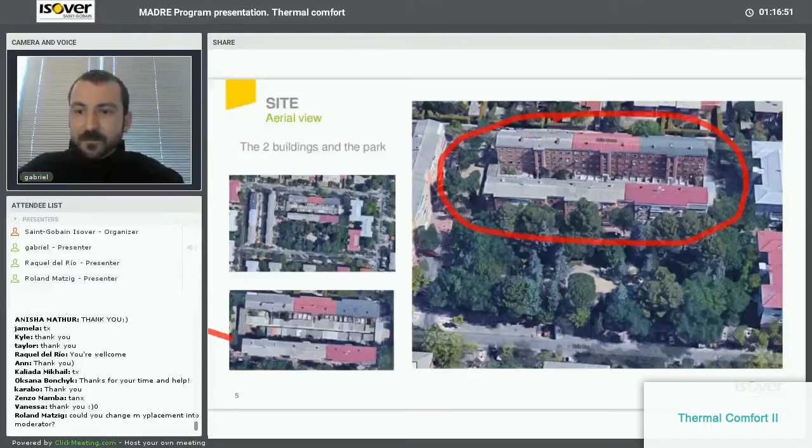We were speaking about the multi-comfort. Well, if we are speaking about the multi-comfort program, and Roland now is the presenter, I'm just going to focus very briefly on a few slides before welcoming Roland to tell you a little more. So, when we are speaking about the multi-comfort program, we are speaking about these dimensions of comfort: thermal, acoustic, visual, and indoor air quality.

Now, in the coming hour, maybe a little bit more, we'll have with us Roland Matzig. He has been a good friend of the contest for many years now. He is also an architect specialized in energy efficient houses. He is one of those few that not only preaches but also walks the talk, and I'm going to show it to you. And perhaps the most important point is that he is part of the international jury.

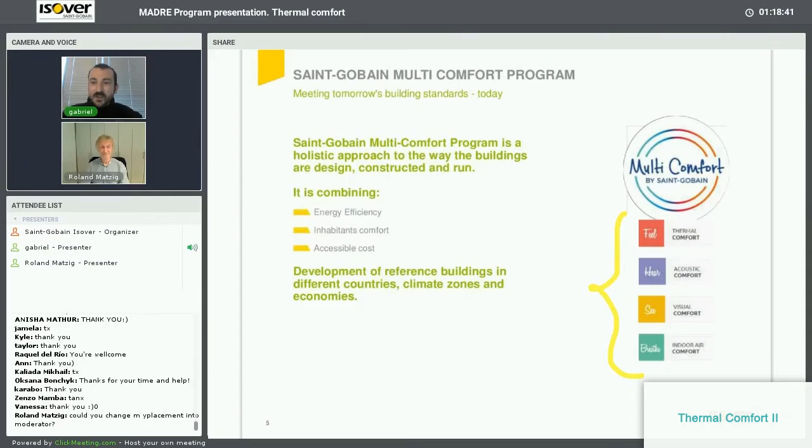So you already had the chance to ask a member of the international jury some questions. Here I give you the chance to ask a second one some questions. Of course, I'm not going to allow him to answer about the criteria, although these criteria are public, you have seen them. But I would like to pinpoint a few things before going to his presentation. Yeah, you have all seen this.

Energy efficiency and thermal comfort have a direct influence on the performance of the human being. And this is extremely important. This is why we are taking it into account, not only because of the CO2 emissions or the greenhouse gas emissions. It is also linked with the people. You will feel better, you will work more efficiently.

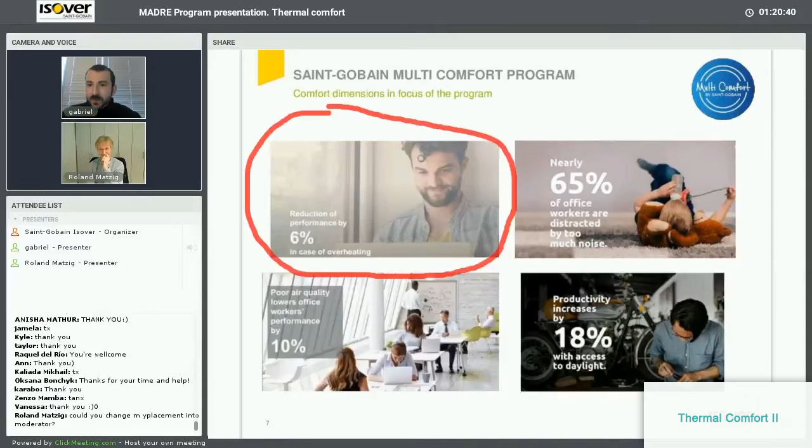Now, before going to the presentation, what I would also like to show you again, just allow me to find it. You will see, for example, a renovation work, this being the office and the house of Roland, as he is living here and working here. So it's quite comfortable to go down in slippers in the morning to take your coffee in the office. This is a multi-comfort house according to all the criteria.

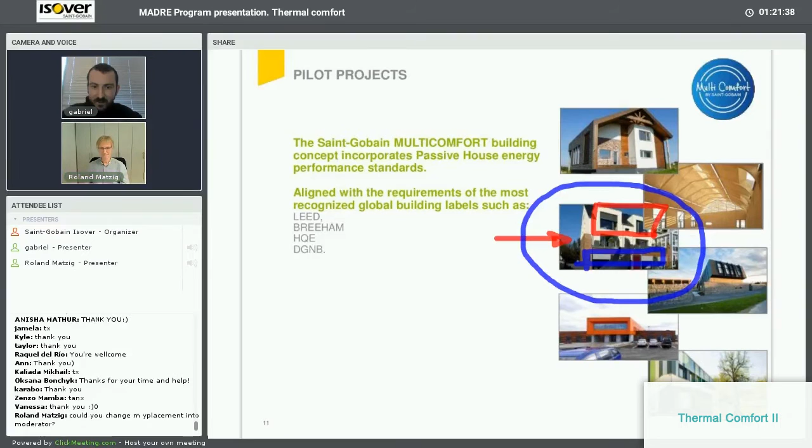And hopefully I will find the presentation. Just one second. I believe it is this one, Roland. Yes, this is the one. Great. Now, can you switch on your mic so that everybody can hear you? No, we cannot hear you, Roland. You don't have the mic switched on. Is that the one? Yes. Okay, great. So hello everybody. Something is on my screen here, but I think only I can see it. There's a question and answer display. I just got it away. Anyways,

What we are talking about is reduction of CO2 emission. That's the basic driver of our thinking, and also the ground you're building your visions on for this student contest. Because the consequences of increasing CO2 emission, we all know that already, are global warming, the greenhouse effect, and all the following problems like climate change, rising sea levels, and all of this. I'm not talking about climate change now, but I just want you to get back to the roots, so you are able to find the answers by yourself by grounding your vision.

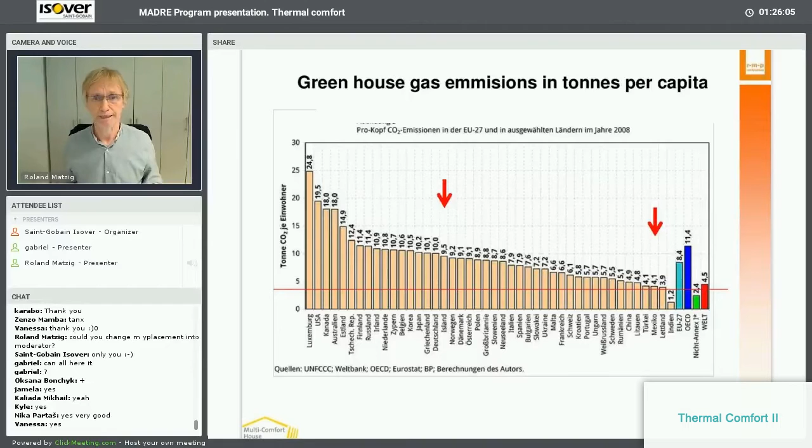So the EU might be a bit lowering down, but we have to go a long, long way. Because, take Spain again, from 8 tons coming down to 3 tons doesn't mean that you have to change a little bit of your lifestyle, a little bit of your behaviors on the dwellings, of the size, of the energy efficiency of the houses. It is a big step. It's almost a third of what Spain is polluting right now.

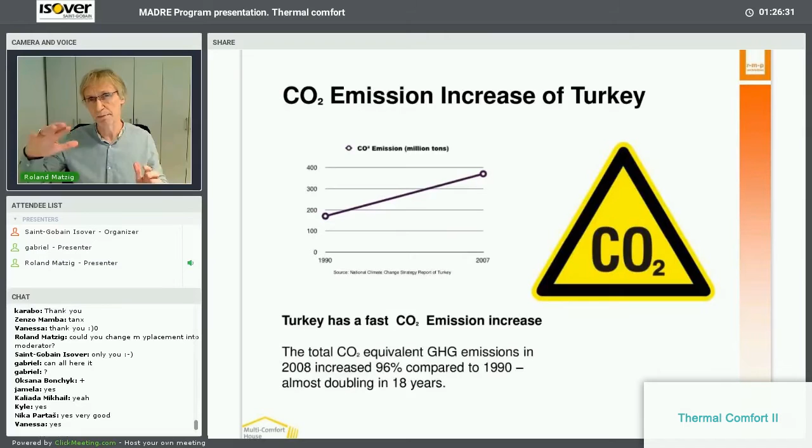So what we have is an emission increase, which is dramatic. And to be honest, all the EU members are rising. Even though they promised themselves to cut down their CO2 emissions, they are rising every year, step by step, and so is the world. So we have a big thing to do.

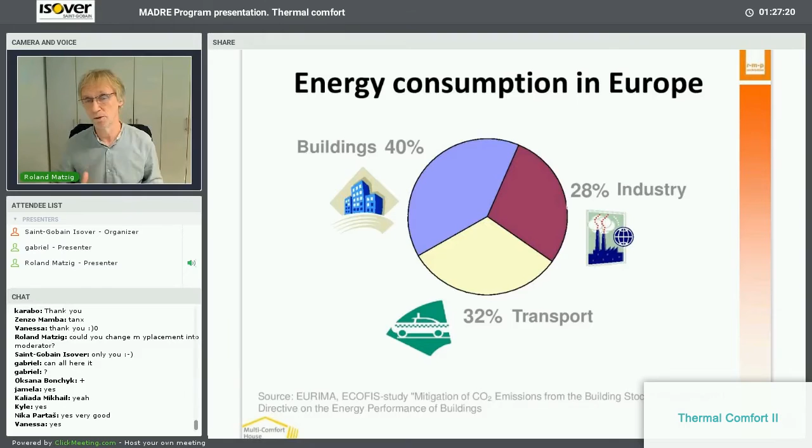And to make it kind of easy, you look at this scale, and you find out buildings are 40% of all the pollution. That's almost the same in all the EU countries. It's a third the transport. It's almost a third the industrial needs like electricity and so. But the buildings, the heating and the warm water is 40%, and this is a huge thing. And this is a huge chance as well, because if we have the buildings cut down by half or even more, we have the whole picture showing a totally different face.

And what we want to do is we want to have the limit of the energy demand as the basis. We are not talking about how to produce it. First, we are talking about how can we realize the savings. The limiting of the energy demand is the major question, and that's why I especially like this year's contest, because we are talking about existing buildings.

If we are going to have a look at the new build, it's easy to say, okay, let's make a passive house and then it's going to be easy because a passive house has low needs. No, the big challenge is the existing buildings. And this year's contest is about existing buildings. You might have the idea of adding some levels or anything to the buildings, one way to think about it.

But the interesting part is how can I cut down the demand? How can I limit the demand of the existing volume of the building I'm designing or talking about? And then, when this first step is done, we are thinking about how do we get the demand produced. Of course, we want to have it on a renewable basis.

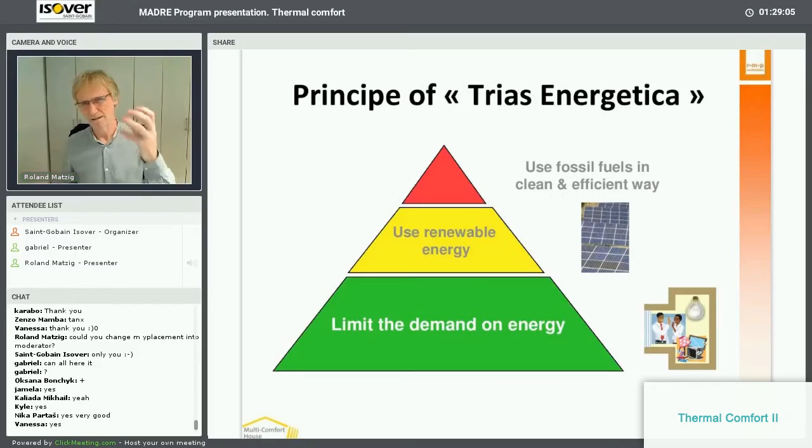And if you've got this red tip, you have a little bit left on fossil fuels, no problem about that. But the green one is the very important step, and the yellow one is the second step on top, and then the rest, you're not talking about the rest. And of course, cutting down the needs. We might have these existing buildings.

I've not seen any actual figures so far, but I guess that these buildings have a need of above 200 kilowatt hours per square meter. I assume so. I'm not sure about that. But you definitely want to have them down in the direction of passive house quality, it's better if you reach it, which means in the existing 25 kilowatt hours per square meter a year at the maximum, and in new build it's 15 per square meter a year. You might know these numbers.

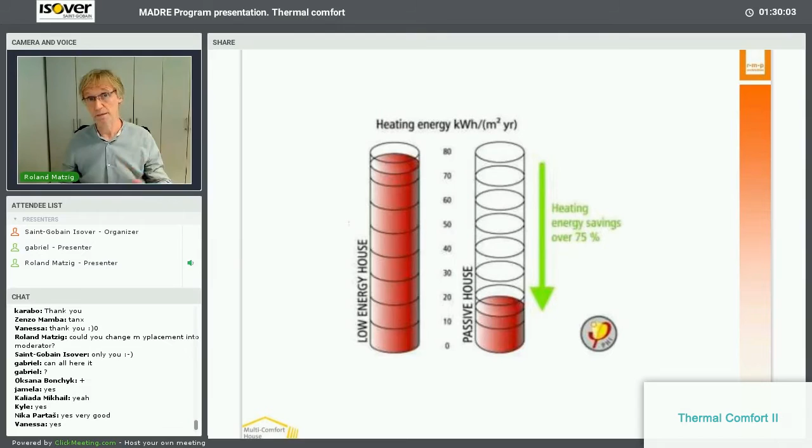Let me give you a goal. If you end up with 20 or 25, be happy with it. But if you can reach the 15, super, absolutely super. But not thinking about just cutting it in half and ending up at 100 or 80. That's not the goal we're heading for.

So this passive house, or these energy efficient buildings, is eco design in buildings. So carbon reduction comes first by insulation. That's the one and only thing. Insulate this bloody shell of the building to a maximum because it's cheap, it's sustainable, it's good for everything. The second thing is you want it to get airtight, because if you have the insulation, the airtightness gets more and more interesting. So the second step is airtightness.

And in this shell, in this envelope, you find all the openings, the windows and doors. Of course, you want to have super glazing and you want to have super doors. And once you have the shell, the envelope optimized, looking at the energy losses, then you want the MVHR system, the mechanical ventilation heat recovery system, which brings you also a step higher on efficiency and gives you super air conditioning in the building constantly.

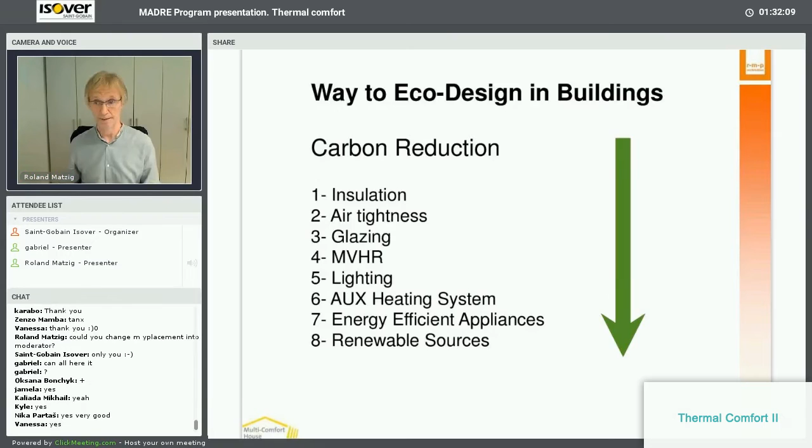Fifth point, you want to look at the light. You don't want to have dark rooms just to have a super insulated wall. You want to have very good lighting, which means look at the windows, where they are placed, in which direction they face, in which size they come along. So bring them in place so that all the rooms have optimized natural lighting. And the rest, like heating system, energy efficient appliances, renewable sources, comes naturally once you have the first five steps done.

So number six here, the secret of certified passive houses. You know that passive house is the only house or the only building system you can certify. This might be a long discussion, if certifying passive houses makes sense or not. But at least we have a certifying system, and this system really works, which has been proven for 20 and more years now. So passive house is the only construction concept you can certify.

And once you're an architect, you might have to answer this question for yourself. Does it make sense? Does it make no sense? For example, we have been building passive houses for more than 15 years now. All the projects are in passive house standard. A few hundred are built. And of course, we have not certified all of them. The first ones, the first 10, the first 20, we went for certification. And then we learned how to do it properly and how to really get the house done so exactly that it's going to be certifiable.

And then we learned to save this money, but we had to do this first step to come to the second step where we can say to our client, are we going to go for certification or not? But if you are thinking about passive house, which has nothing to do in particular with the student contest, I'm telling you out of practice, go for certification, go for this quality improvement, and then you'll find out passive house is energy efficient. Absolutely, it's the best standard you can find.

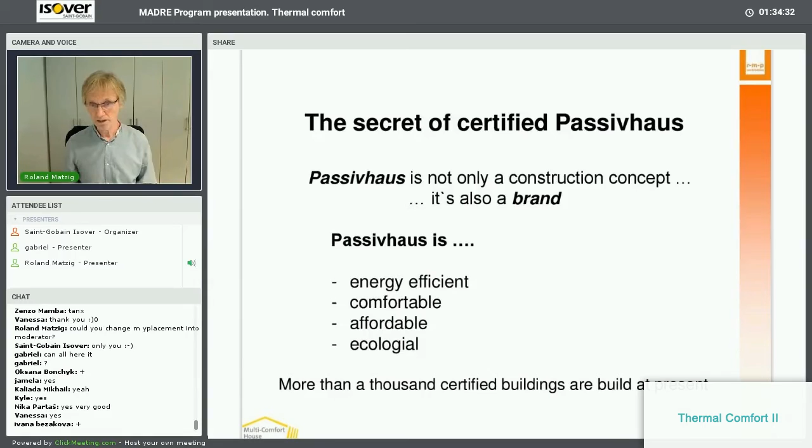It is comfortable. It gives comfortable living to its inhabitants. It's affordable after a few years. All this extra investment for the top level of energy efficiency is going to be paid back by the bills for running the house, and it's ecological. So more than 1,000 houses, a few thousand houses, have proven these facts.

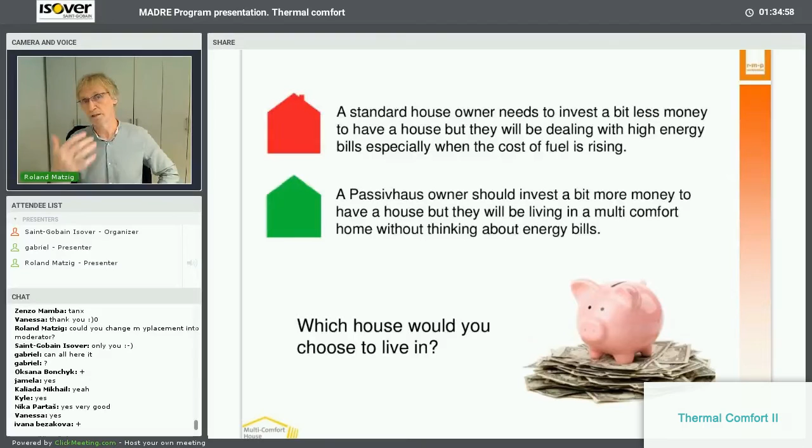So when you have made the decision to go for a passive house and you ask, for example, the owners, by now they will all tell you, our owners do tell us, we would never want to have anything else than a passive house. And even if it was a bit more of an investment, maybe 3%, 4%, 5%, we would do it again. I expect you're familiar with all this information.

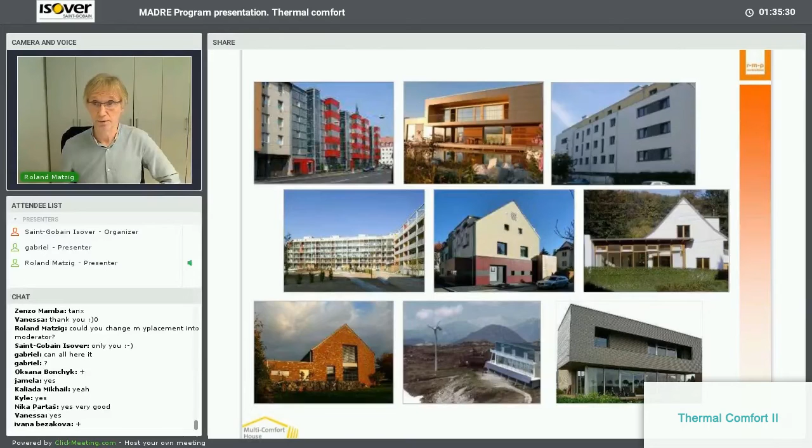You find these houses in all kinds of styles: single family houses, multi-family houses, commercial, schools, kindergartens, big houses, small houses, renovations, even on top of the mountains, in the desert, everywhere. By now, you find the passive house concept running and working everywhere. And it's always following the same principles. These principles are displayed on this sheet here.

First of all, the envelope, which is in your student contest quite a challenge, because maybe you can't run the insulation around the house just like that here, but that's what you want it to be. Around the house, you want to run an insulation layer and also an airtight layer. The blue and red line here means the airtight layer, and by working on your details, you should think about all these little details. How do I run my airtightness layer all along the envelope?

And then the second thing, the MVHR system. You want to have an MVHR system, which means fresh air in, exchange, fresh air in the house, but warm extraction of the air, exchange of the heat, and exhaust air out. So most of the heat stays in the house. Ventilation minimum 75% recuperation is the threshold, but you will find units that recover up to 90, 92, 93%. You should go for these even in your renovation, because it makes it much easier for the whole system to be on passive house level, because you might have some trouble running the insulation.

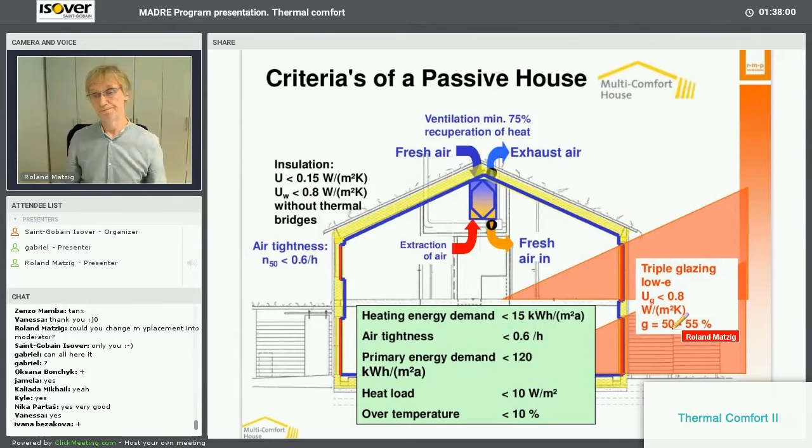Thermal bridge free. So you can, for example, have a higher recuperation percentage, and then it levels a little bit. The second very important fact is, where do I have my windows? Which quality of windows do I have? And how much of the solar array do I gain for the internal heat or cooling of the house? You should have at least triple glazing with a U value of 0.8. If you have 0.7, 0.6, 0.65, even better. And your G value, which means how much of the warmth...

I'm still here, don't worry. Well, Roland has joined us from Mannheim in Germany. I know, I see it. So as you can see, it's quite challenging. We'll wait for him to get back on track.

He was mentioning the triple glazing. Now, I'm sure all of you have been going a little bit through the documentation. If you have not done that, I strongly suggest you go through the documentation available on the website, the website of the students. Within this website, you will find quite complete documentation. One of it is a multi-comfort house in hot climate, and this is an analysis of multi-comfort house in several climates, one of it being Madrid. You will be able to see the recommendations in terms of glazing. As Roland was mentioning, he was speaking about triple glazing. In some cases, you can reach the same levels with double glazing.

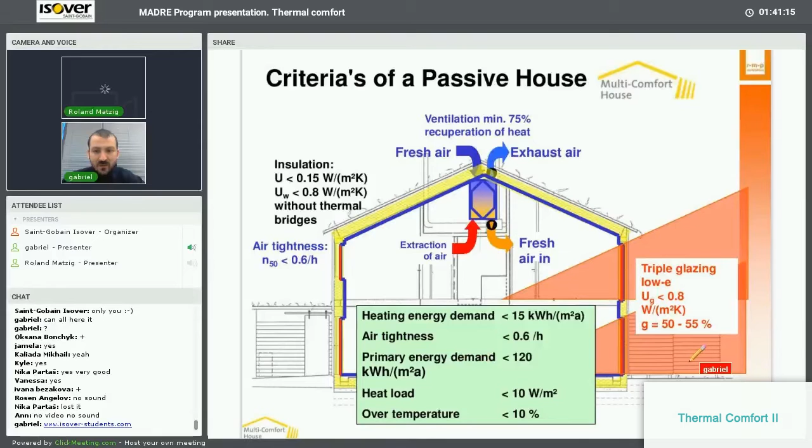Furthermore to this, what I would add is that it is not that complicated as a principle, or not at all complicated as a principle. The question is to treat correctly all the points. Once you have done that, you are within the right philosophy. If you are with the right philosophy and doing it step by step, then everything will fall in hand one after another.

Now, the main 10 points that Roland will also talk about once he joins us back: thermal insulation, no cold bridges, or if you wish, no thermal bridges, air tightness, the glazing, ventilation, heat recovery, internal gains, external shading, and low heating and cooling load. As I mentioned earlier, if you take an action, you will see this affecting also the other.

I have Roland on the phone. Just one second. He's going to set it up again. Now...

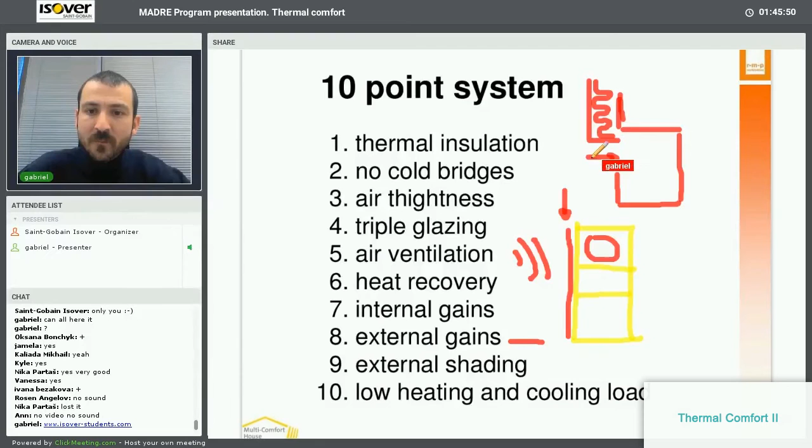If I look at the section, supposing the balcony is not closed, you can run some kind of insulation here in front of the building, or you can run insulation there. In this case, you will have some kind of width, and this width will have a direct effect over the sun coming into this apartment.

So if you increase the thickness a lot, going for 20 or 25 centimeters of insulation or even more, you need to take this effect into account. You can solve it either by replacing the windows with ones having better transmission than the previous one, or by increasing the surface of the window — but if you increase the window surface too much, you will decrease the acoustic properties. So this underlines one more time that they are interconnected.

It's not that you do something and the others stay as they are.

That's the reason this training also focuses on giving you the main points on each comfort dimension, and we start first with the thermal behavior. Back to Roland now.

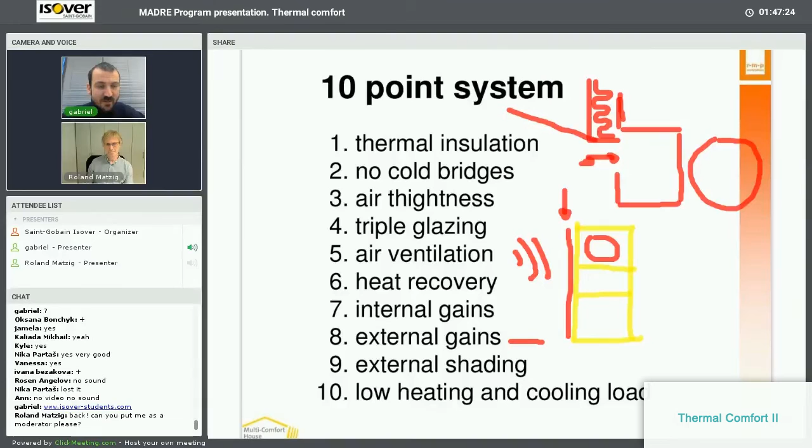Are you having your mic set up, Roland? One, two, three, test. Yes. Okay, so, thermal... sorry for this interruption, my system was down, I don't know what happened. Sorry, I think we just continue.

The 10 points — I'm not sure how much Gabriel could explain now, but this is the ranking I found: thermal bridging or thermal insulation, thermal insulation with no cold bridges, meaning especially in renovation a lot of detailing, airtightness, triple glazing, air ventilation, heat recovery, internal gains meaning people and electricity and so on, external gains which is basically sunlight, external shading which is against overheating, and low heating and cooling demand.

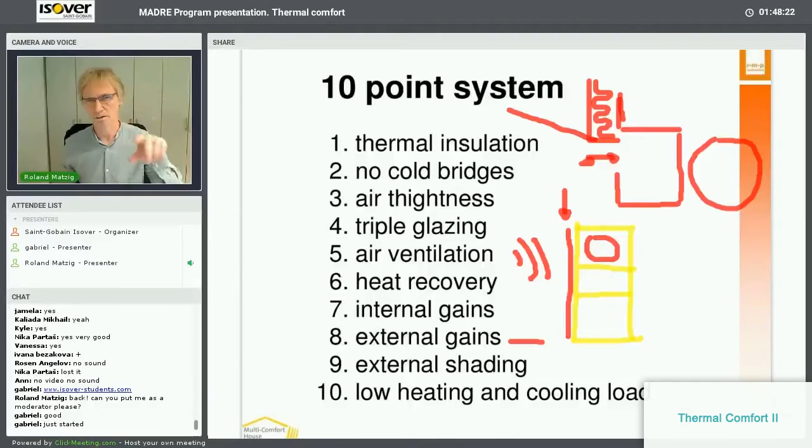To give you a picture of what these points mean, I have my house, the renovation of my house — I'm sitting in this ground floor right now. It's a renovation; the house was first built in 1920, so almost 100 years ago. During the Second World War it was demolished, the upper part, while the lower part, the cellar, is still original. After the war they built the house again, so it was kind of easy, cheap, but a good place.

What we did: thermal insulation. It's a renovation, so it's quite similar — this house is much smaller compared to the house you're asked to think about, but the system is the same, the envelope. What can we do to the envelope? Of course we can run some external insulation. You see here the mineral wool over the facade of the house, and in this picture we also ran the mineral wool along the sloped roof.

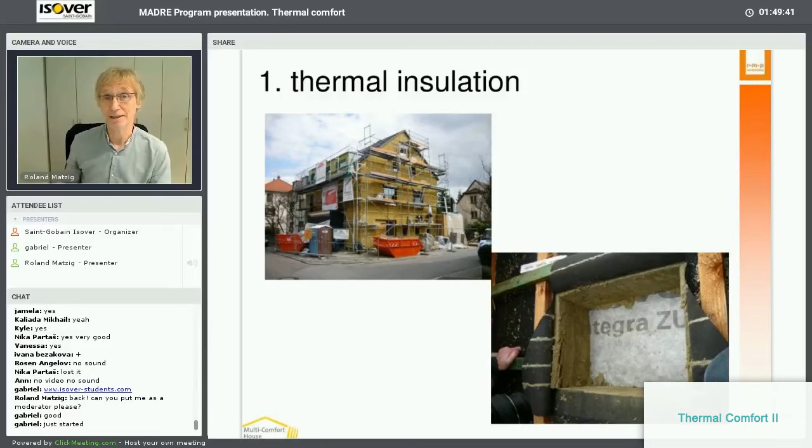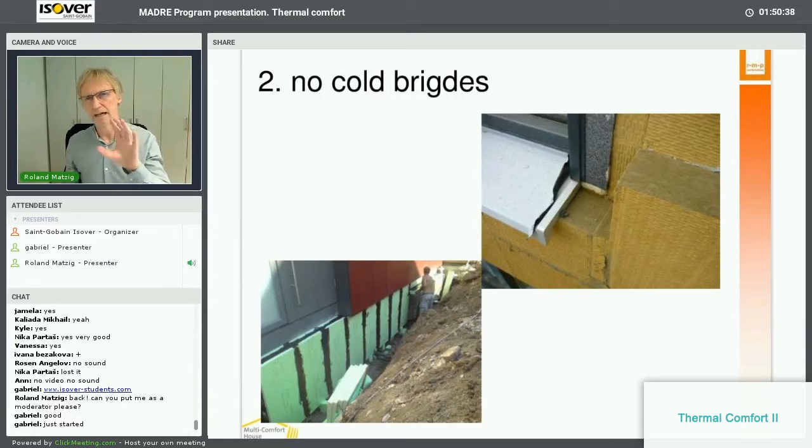And especially the connection to, for example, windows — you see the window came with its own foam, the gray one, and here we've got the mineral wool. But there were little bits and parts where the craftsmen couldn't work that precisely, so we had to add foam there. Every little detail has to be filled with insulation so you have no cold bridges.

Very important then is the MVHR system, the air tightness, which works together — you need the air tightness on one hand side to have no difficulties in your building physics.

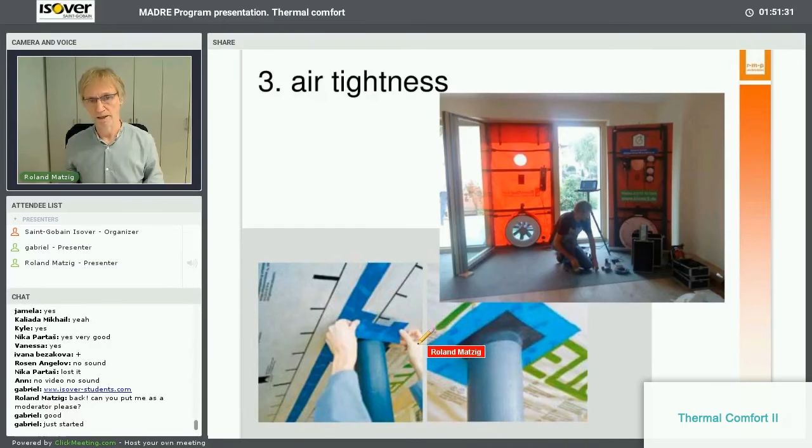On the other hand, you need it for an efficient MVHR system. That means you have the test, called the blower door test. You have this ventilation in one of the doors, and you get under pressure and over pressure in the building, and you need to have this air exchange lower than 0.6 times the volume per hour. To get this, you have to really seal all your devices, pipes, and cables running through this air tightness layer.

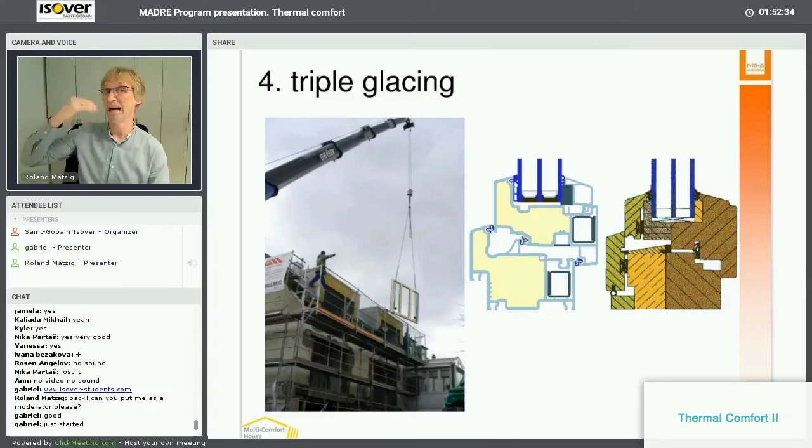In your student contest, you will have the same challenges. You will have to change windows on the back side of the building towards the inner yard, and you have to think about how to get these windows there. If you give this answer, you will be recognized as somebody who thought further than just making a drawing and a section saying, I want super glazing, without thinking about how this glazing gets into place.

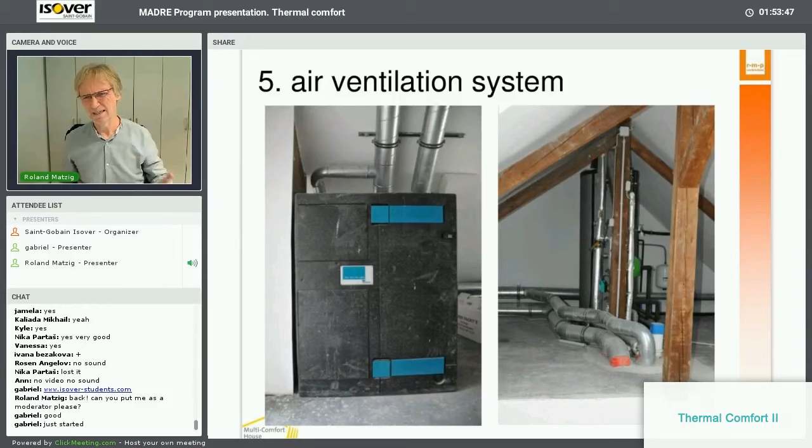Air ventilation system, second challenge in a renovation. The size of the piping is not like a cable, it has quite a dimension. If you are thinking about putting 6, 8, or 10 dwellings on it, it's even bigger than what you see here. We're talking about sizes of 200, 250, 300, 350, maybe 400 millimeters in dimension. You have air in and air out, so you've got at least 2 pipes. Think about where to run these pipes, how to run them, and give us the answer, not just draw some lines somewhere. Give us the answers on how to get there, how to do it sustainably, cheaply, and consistently.

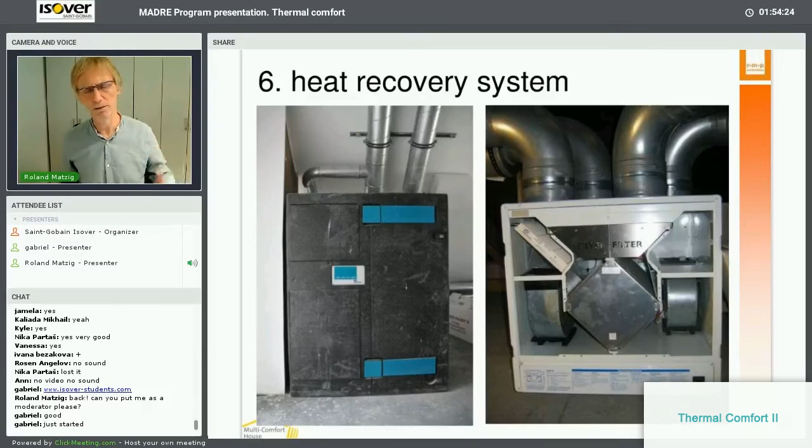The system itself, the heat recovery system, is super easy. There's an exchanger, two ventilators, a filter, and that's it. Here you see an old recovery system, but it's still the same today. Here you've got the exchanger, here the filter, and here one, and here the second ventilation. Super easy, but you have to place it. Think about whether it's best in the cellar, in some dwellings, under the roof, on top of the roof, wherever. There might be a lot of answers.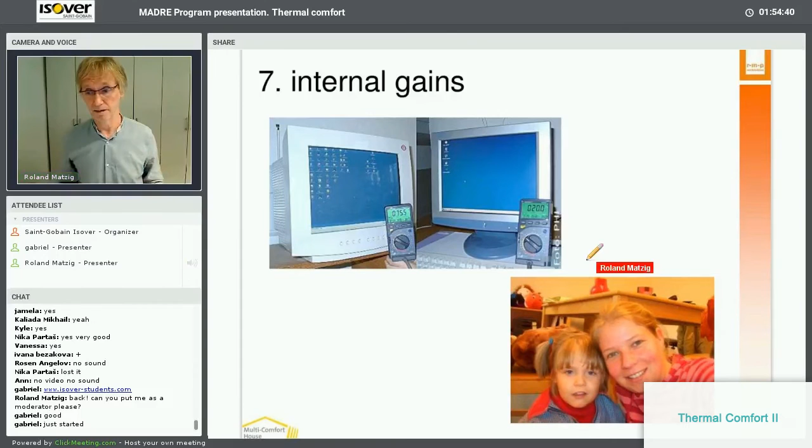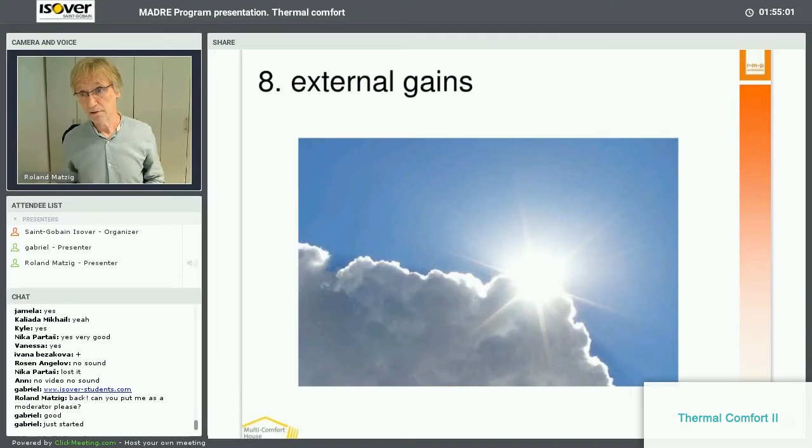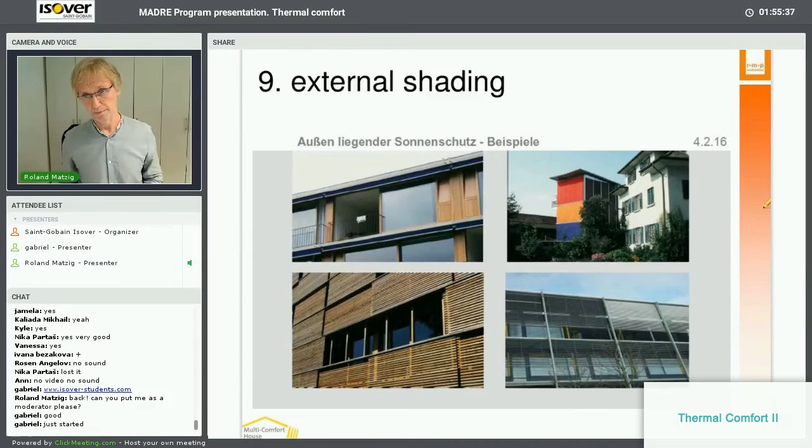Internal gains have to be calculated, especially people. So you have 2, 4, 6 people in a dwelling. How much gain do you get from the electric devices used in your dwellings? Very important. And of course external gains means, for example, which direction does your building face, and is there some shading somewhere? Or do you have to get shading on the outside, like here, for example, some examples, to prevent overheating? Because once you have a very well insulated shell envelope, overheating can't escape easily. Once you create overheating inside, it takes a long time to get it outside again, because it works like an insulated canister. So you don't want overheating. To prevent overheating, you need shading on the outside.

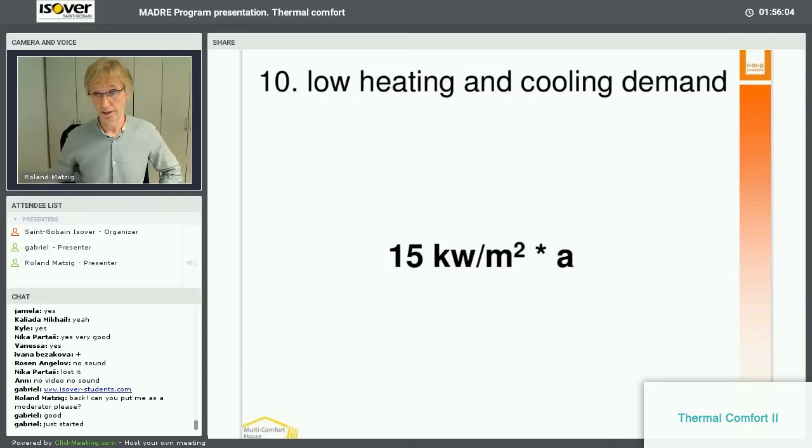Think about it, calculate. We are talking about 15 kilowatts per square meter a year. If we are heading for the goal of new build, we are talking about 25 kilowatts per square meter a year. For renovation, in between, you should be able to get it, with the climate of Madrid, it shouldn't be too difficult to get in between, towards 15 kilowatts per square meter a year for heating and cooling. Very important.

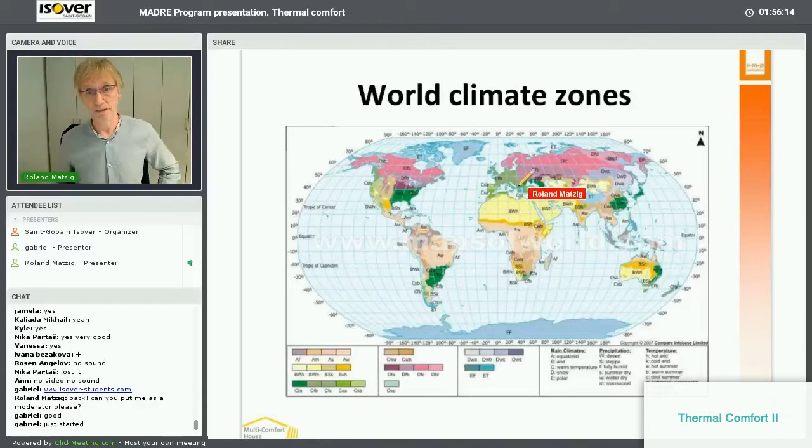So we have different climate zones on the planet itself. Yours down there is not that critical, it's the moderate climate zone. But just to give you an idea, from moderate and cold climate zones, briefly, in moderate and cold climate zones, you want to have the insulation and the airtightness layer around the building.

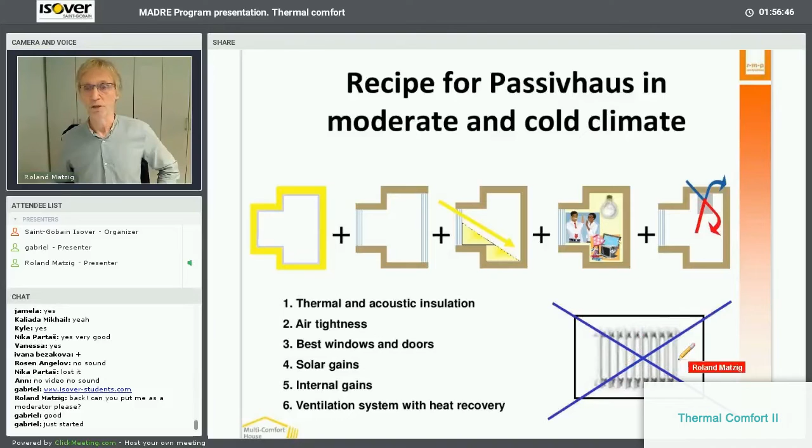You want to have your triple glazing in addition. You want to have your daylight getting inside, and you have to calculate your inner gains as said, and you want to have your heat exchange. And what you don't need is a conventional heating system.

If you have, for example, hot climate - and the student contest task, Madrid is just in between of hot climate. In the summertime it's quite hot, but it's not definitely by definition a hot climate, it's in between hot climate and moderate climate.

And you see, hot climate does need also insulation and an airtightness layer around the whole building, but by the size of the yellow line, it's not that thick anymore. So it's not that important for preventing heat losses.

But against overheating, what you want to have is maybe overhangs, balconies, or whatever. So you want to get the outer shading to prevent overheating.

And maybe you want to have - it's quite easy and very efficient - a night cooling system, where you might be able to open your window, and then heat recovery. And what you need is a ventilation system for active cooling.

No, it might be a good thing sometimes, this dehumidification, but in Madrid I suspect that you don't have to think about it twice.

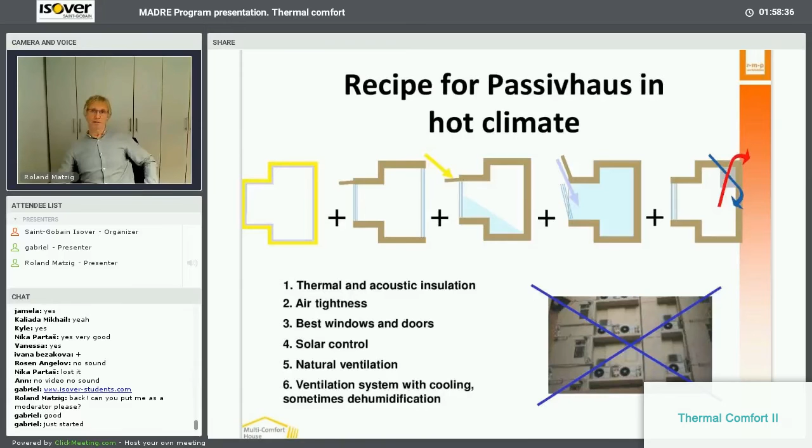So I give you an example of a new build in Germany, just to show you the reaction of the design in different directions once you try to optimize passive house design to the building.

So this is in Frankfurt City. It's 5 buildings: one called A, a second called B, a third called C, and this one also included in C, and this is D. So it's 5 of them, and it's called Sophienhof, which was the first multi-dwelling house in passive house quality ever built, with 149 dwellings.

Important: 101 of those are owned by or used by the owner, owner-occupied, and only a quarter of it, 48, are rented out, which affects the behavior of the user differently. Then there are a few commercial units in the ground floor area, and 156 parking lots underground - this is the parking lot area.

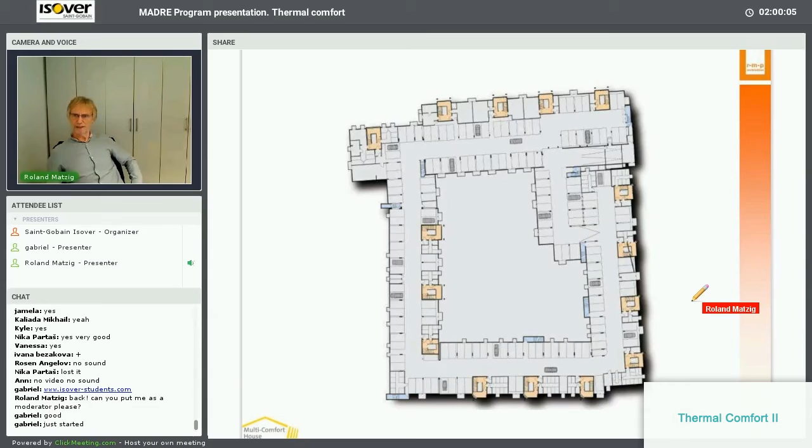It's outside of the passive house envelope. You see these orange displayed staircases - they are inside the passive house envelope, but the parking lot itself is naturally ventilated, outside the envelope. The passive house envelope starts at the level of the street, which is the ceiling of the parking lots. So the ground floor and all floors above are passive house quality.

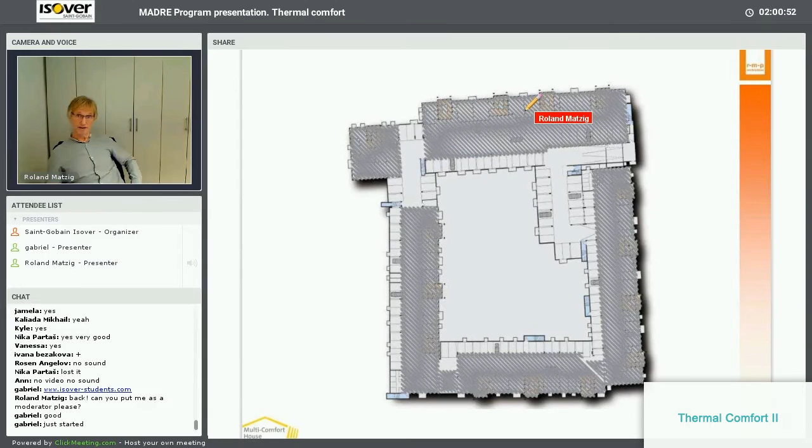And you see, for example - where are we - this is the way the buildings are placed on the parking area. So all the area has an underground building, and the passive houses are on top. It's not covering all the area, but it's of course covering the areas of the staircases - they run down to the parking lot.

And for example building A - here's north, on the right, 45 degrees up is north. So that means the inner side facing the courtyard is facing almost south. And you see this from the north side, the same building from the north side: small windows, not that many windows, staircases where you don't need, or it's not a big deal if you have too warm or too cold conditions.

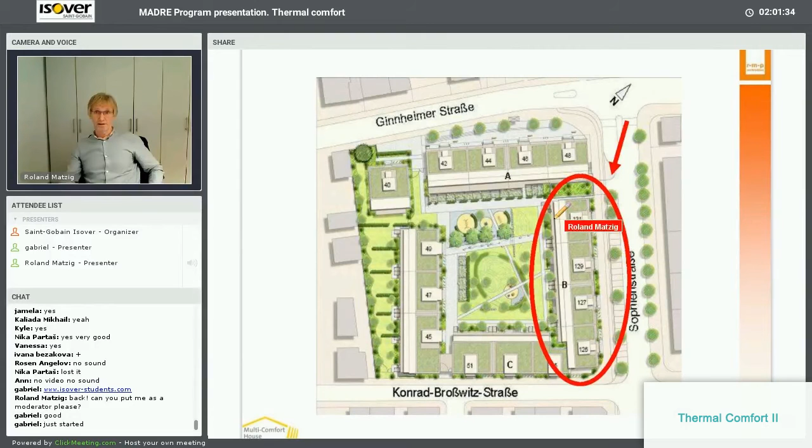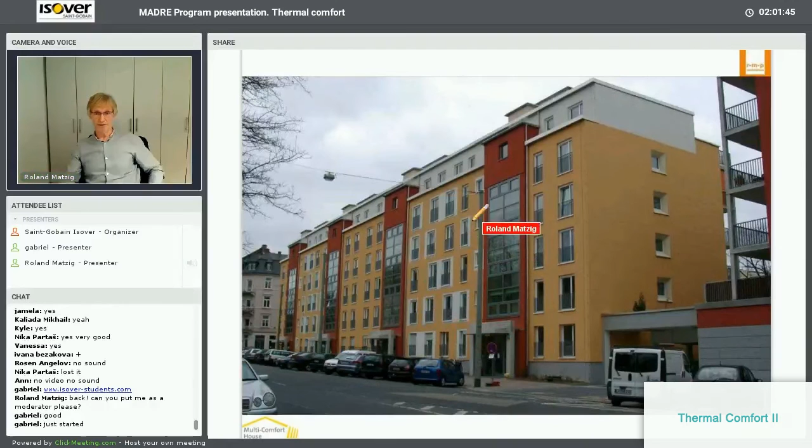External shading, external gains - for example, this building here, B, looks kind of similar from the street, also not big areas of windows, just staircases. But to the inner courtyard it looks totally different. Why? On one hand, because this is the courtyard, and you want to have the living side facing the courtyard, and you don't want the balconies facing the street where it's noisy.

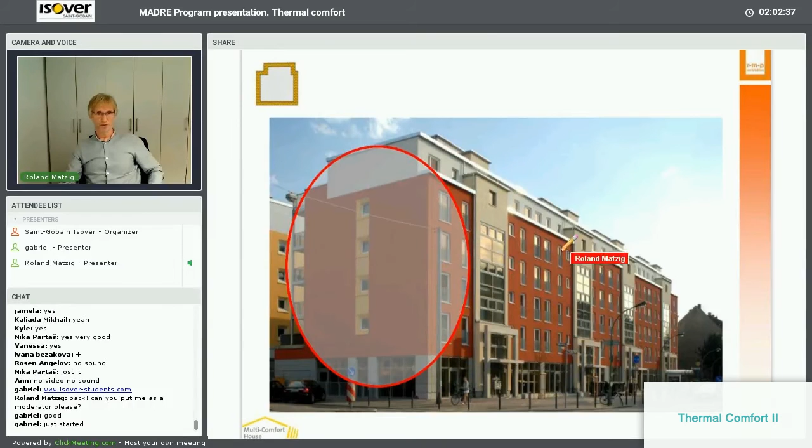But this side is also south-facing, and you can see by the shadow here, the balconies have this size, so in summertime they have natural shading of the windows, which prevents the building from overheating. That was the design idea behind this decision. And on the gable wall, we have almost no windows because this is north facing.

This is a thermal image of the gable wall at nighttime in winter. You can see a car that's just parked and still has a warm motor because it was running, and the inside of the car is a little warm. The same temperature shows up around this window frame, and we were astonished to find out this window was slightly opened, which explains it. The rest is all dark blue, even more blue up here, maybe 8 degrees, which is a cold surface. That means a great U value, and not a lot of heat is coming through this wall.

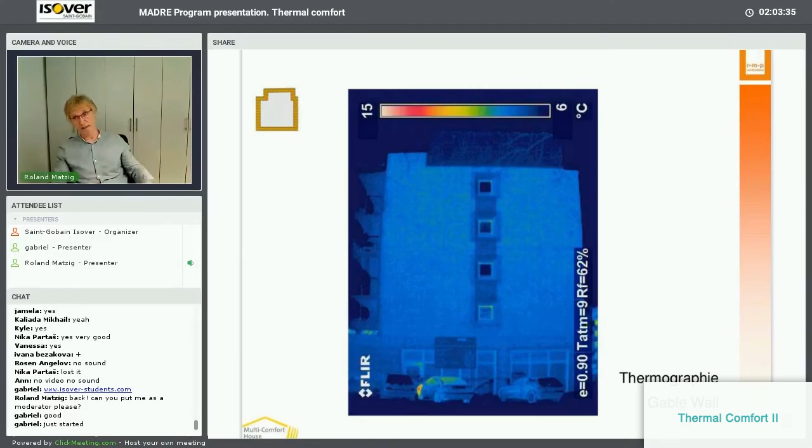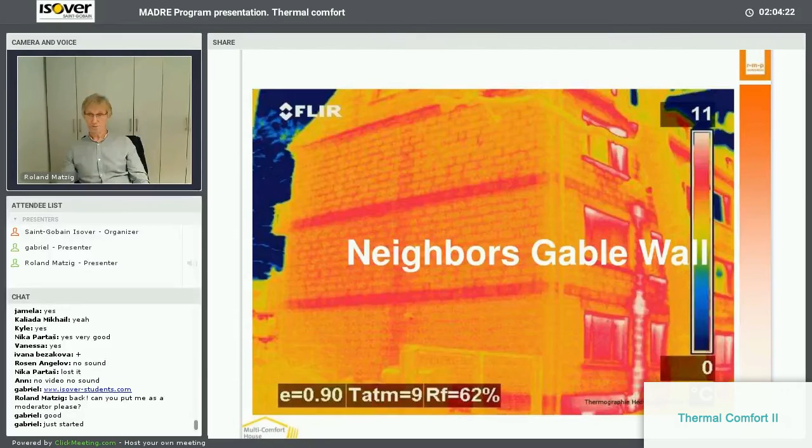We changed over to the other side, to an older building on the same street, same time, same direction. The neighbor's gable wall looked like this, quite warm, about 10, 11, or 12 degrees. You can even see the ceilings and the partition walls from inside. You see white here, very warm, 12 degrees on the outside, even more where a window is opened or there's a bad window frame, or a small window area. So a lot of energy, a lot of warmth is coming through these walls because the U value is bad.

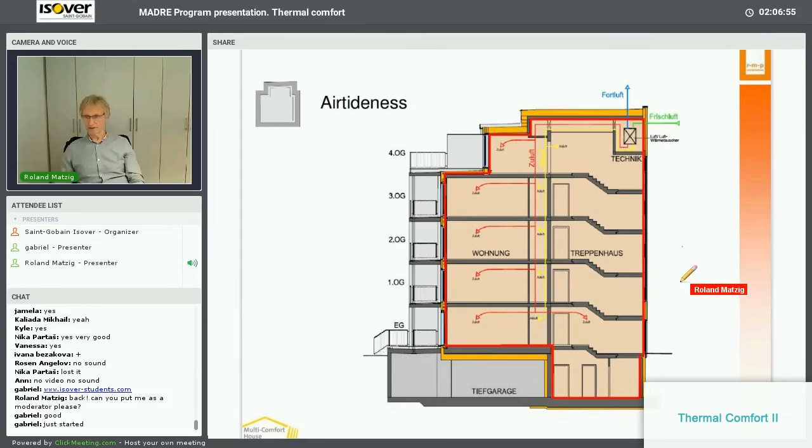From here we run the central heating pipe toward all the different levels and dwellings, and also a second pipe for the exchange extract air. This might be a very efficient idea for your student contest task as well.

Lighting and solar gains go together on one hand, but on the other hand you want balance. What we did here is avoid outside shading on the window because it blocks your view, but we also didn't want overheating from solar gains since it's almost south-facing. So we decided to have balconies, as shown in the other pictures. The balconies let you look out and view the garden in the inner courtyard, while also providing shading in winter and summer, when the sun comes in at a lower angle, giving us solar gains in the house. So you have to find the balance between winter, summer, looking outside, going outside, and having natural lighting.

This room has a lot of natural lighting because of the big windows, and still there won't be any overheating problems.

On the east and west facing side, we could make it different than we did. We have some normal size windows, maybe they're a bit bigger than normal size because they run to the ground. But you can imagine by looking at these details here, we also have the possibility, here you can see it, it's closed here. We have the shading which runs down, but then the view is blocked.

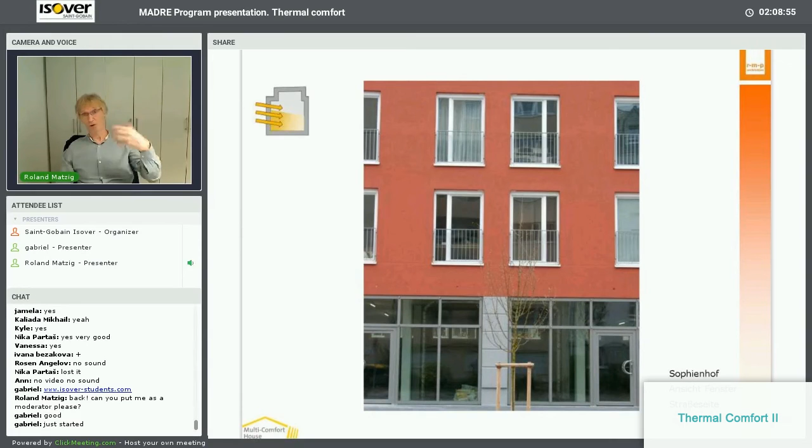This view is not that important because it goes to the street side, but you have to deal with that. Want to have the view, don't need to have the view. Want to have the sun, don't want to have the sun, and so on. This is important, and you have to think about it and get your design connected to these questions.

Within the dwelling, that's where we come down with the central piping, and within the dwelling, we have very short ways to the rooms. You don't have to run all the way through the room to have your ventilation system, but you have, for example, this gray area here is a suspended ceiling, 15 centimeters suspension here, and there is the piping. Red one is the fresh air, yellow is the used air.

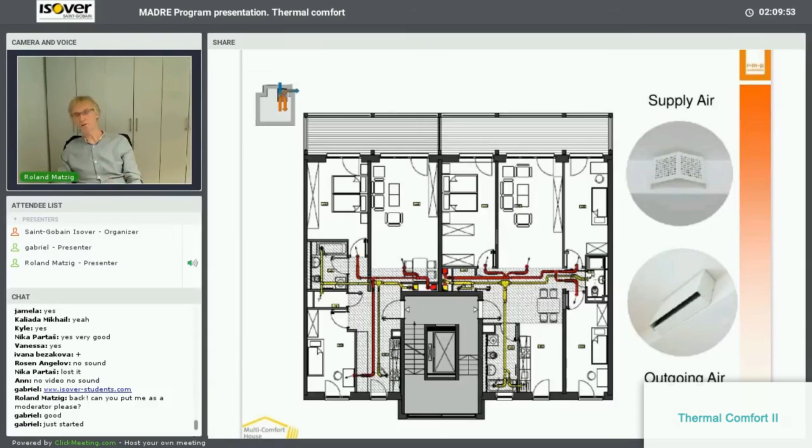And we reach all the rooms with very short piping. And outgoing air, we have these easy looking covers, and supply air to throw it all the way from here to the room. We have another kind of cover of the piping.

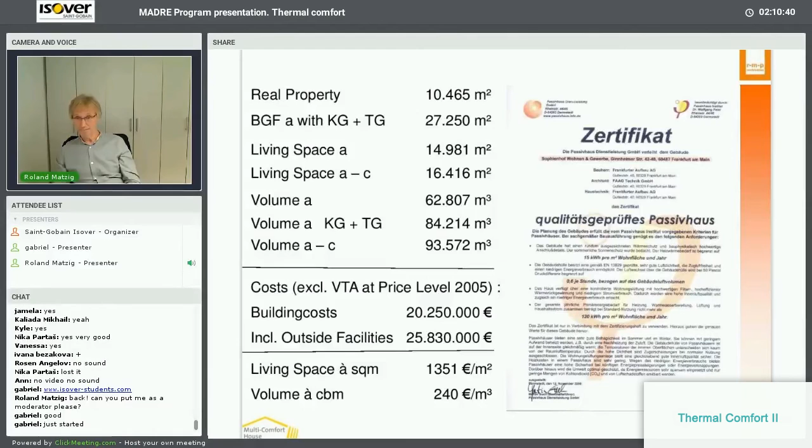And for example, the costs, not very important for your project, but just to give you an idea, it's 1,350 euros per square meter, which was by then, this is 10 years ago now, only 3% above the average cost level of social housing. So 3% was the investment in this quality of passive house and good, healthy air, which is paid back already by the low running bill of the building.

And what we also did, and this could also be a nice idea for your contest as well, we wrote a user manual for the inhabitants and the facility manager, because it's not difficult, the passive house, but you have to understand what's happening, that you are hardly losing any energy, but you are gaining a lot through the windows, and you have this heat exchanging system running. Because some of the people say, I want to open the window because I need fresh air, and they're not realizing that they get constantly fresh air through the ventilation system.

But if you, in the wintertime, for example, open your window and your heat bill rises up, then you might complain and say, "Whoa, the savings are not realized as promised," and this is not true. You give these people a user manual, and you'll be fine.

And for example, in your student contest, we are the people. You have to give something to us. And if you have the idea of just giving a short description of how to use the building and what are the tricky points about the building, you might get some extra points for it from the jury. That was this kind of presentation, and now I'm open for your questions.

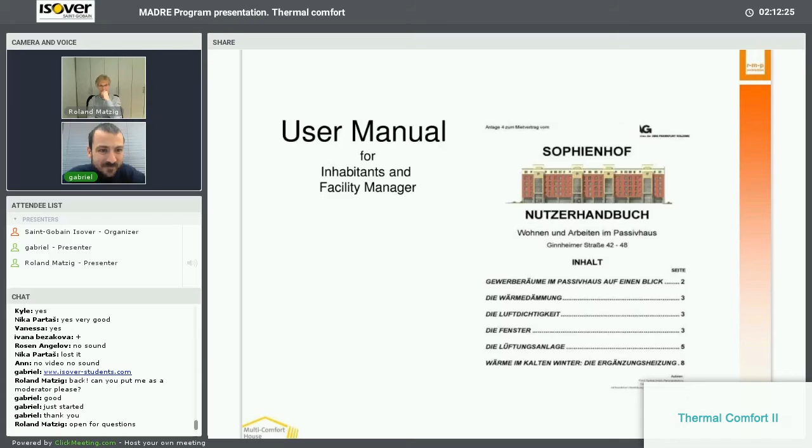Open for questions, guys. Let's see. Yeah, back on the sound. So no questions? Come on, don't be shy. You don't get another chance with him. Okay. We'll give them 2 more minutes.

How's the weather in Mannheim these days? Super. We had a warm, sunny day. Wow, great. Come on, guys. Ivana, let's see. For me, it's fine also.

It means that you know everything that you need to do for the part linked with thermal comfort. Yeah. Okay.

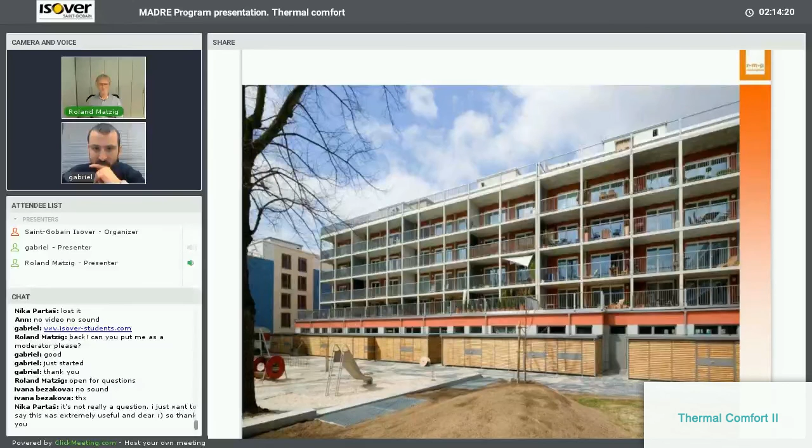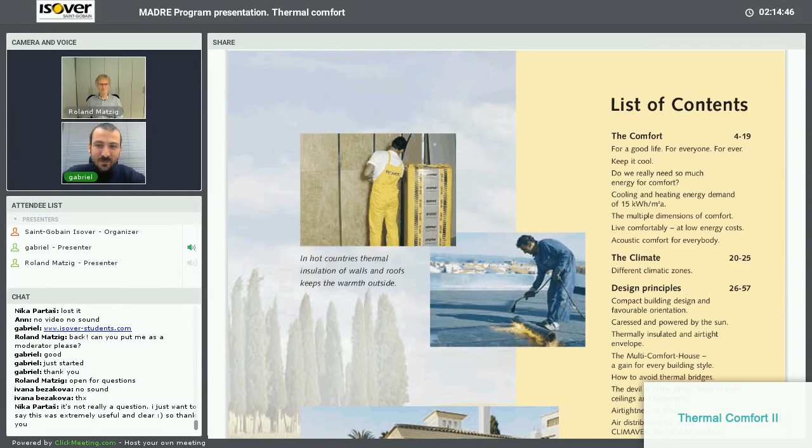So as I mentioned already, Roland, everything is clear, which is extremely encouraging. It means that you will get a very clear presentation also during the international stage. I just want to pinpoint for you one thing. This document, which is called the Multi-Comfort House,

I think Roland lost his signal again. Nevertheless, here you have this document which is called Keep Cool in Hot Countries, Save Natural Resources. You have it on the website, in the download area.

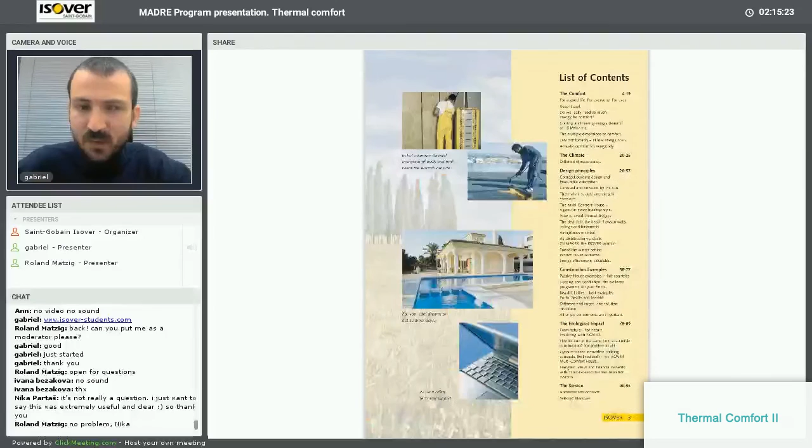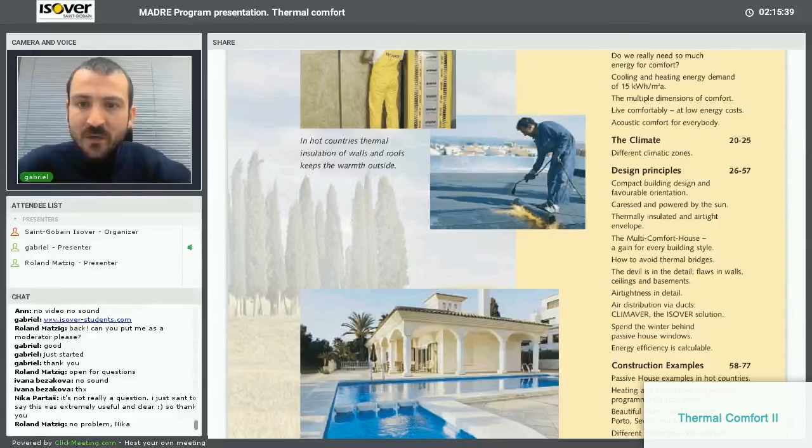And this is a study which will allow you to see, when speaking about warm climate, what are the design principles, some of the construction examples, ecological impact, and of course the introduction parts. And I'm only going to take you very briefly through it. So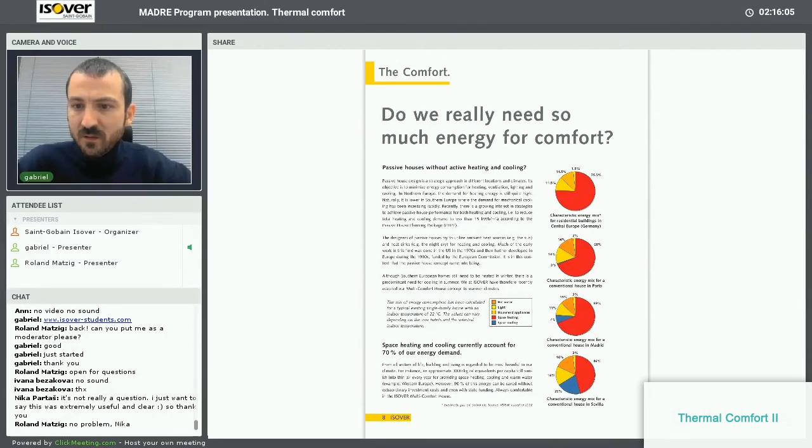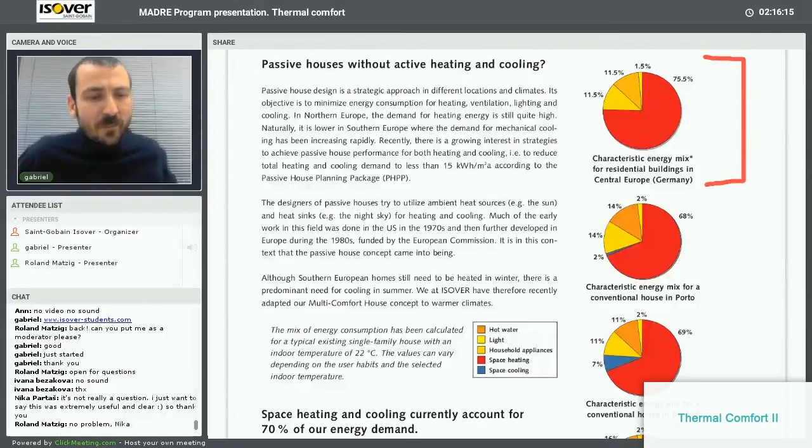You can see here the climates. This is the energy consumption characteristic of a building in Central Europe, this is Germany, and you can see here the other analyzed climates. So you have here Porto, here you have Madrid, and here you have Sevilla. You will notice that basically the values are more or less the same if you take into account also the cooling, because the heating and the cooling are part of the thermal comfort. You do not think only about keeping it warm during the winter. You have to keep it also cool, let's say, during the summer.

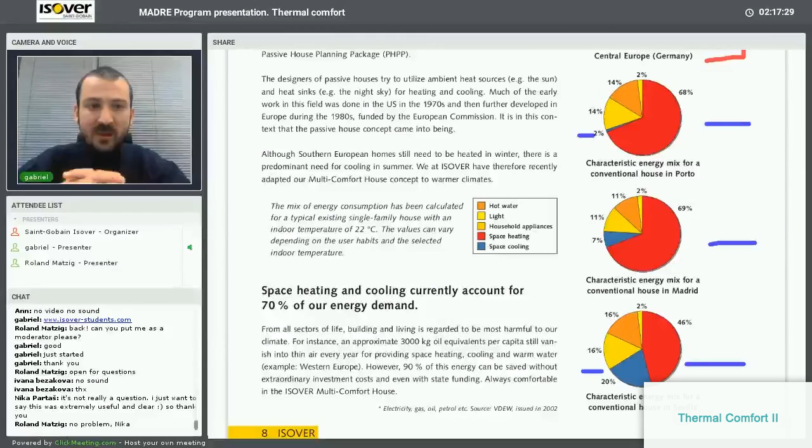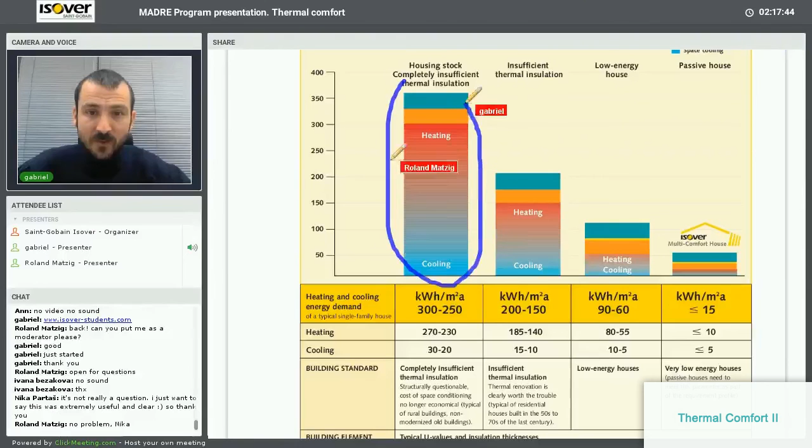And here you have about 70% heating plus cooling. Here you have about 76% heating plus cooling, and here you have about 66% heating and cooling. And this can be solved with a careful design when speaking about thermal comfort. Here you can see some of the elements. So basically, the building that we are discussing is here, and your scope would be to reach this one. And here you can see also some of the effects.

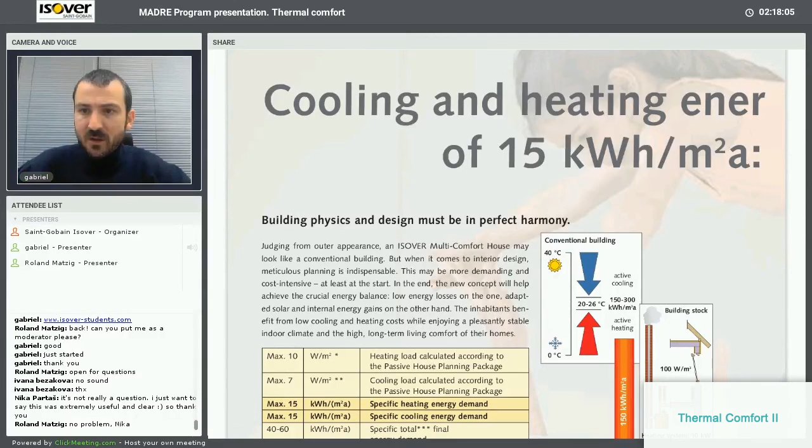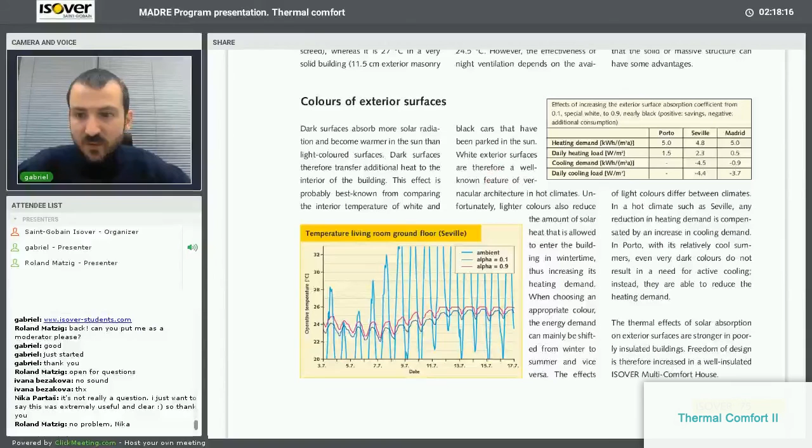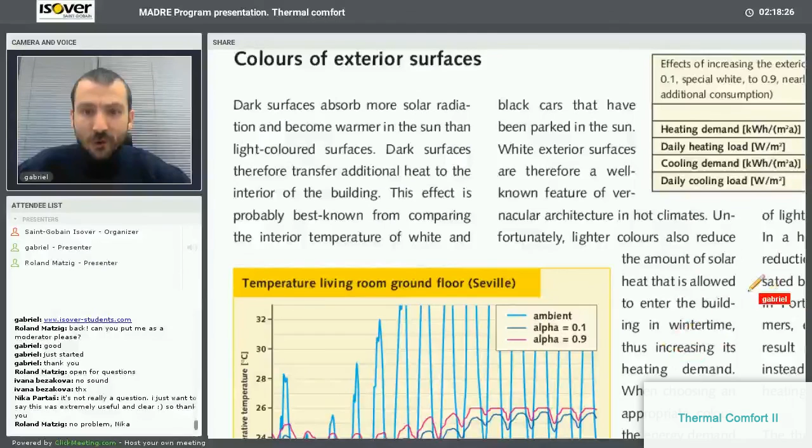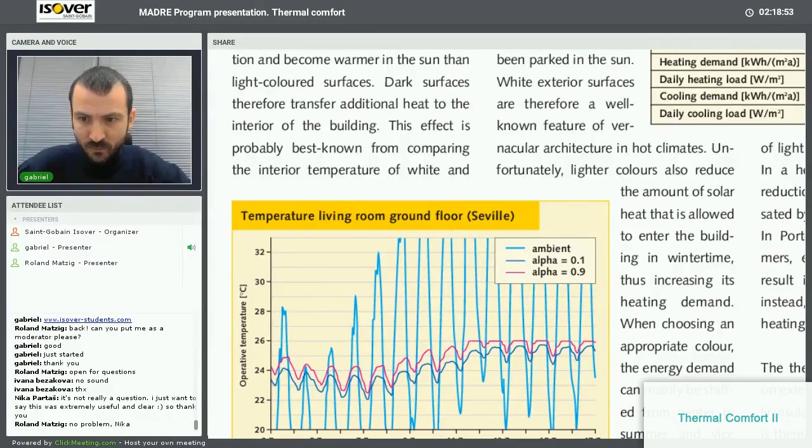I would just like to pinpoint directly some of the findings. Let me see if I can remember by heart. So, 1 second. Yeah. You can see, for example, here, I'm not going to enter into the details, but just to give you a flavor, the effect of the color over the temperature in the living room. Depending on the color, if it is a cold color or a hot color, you can have a difference as much as 2 degrees, only taking into account the color of your building. So this will also affect your design.

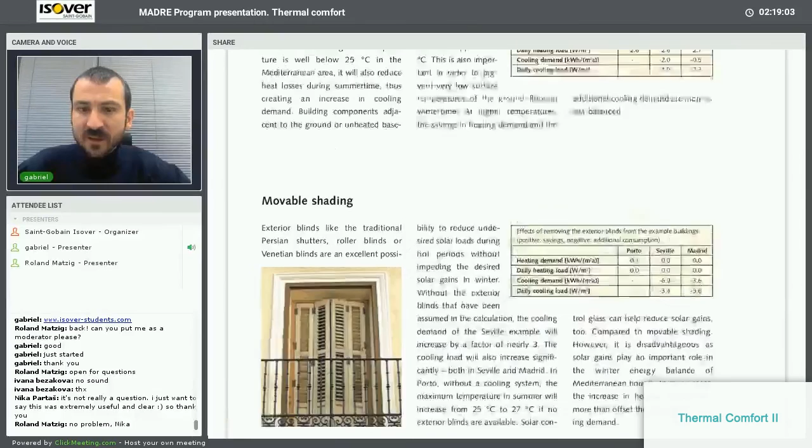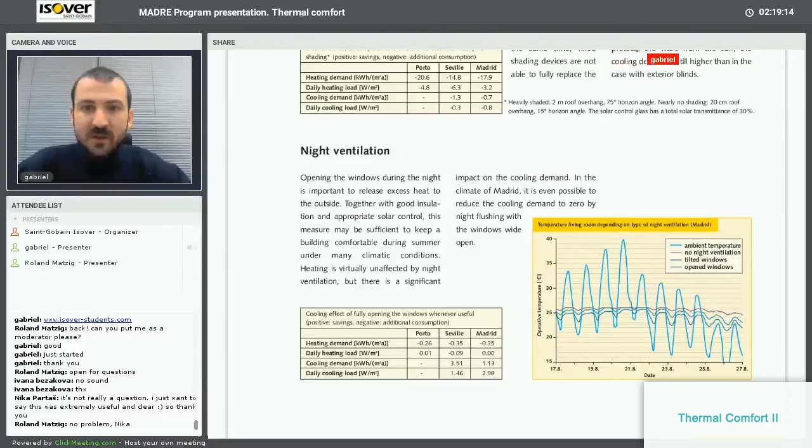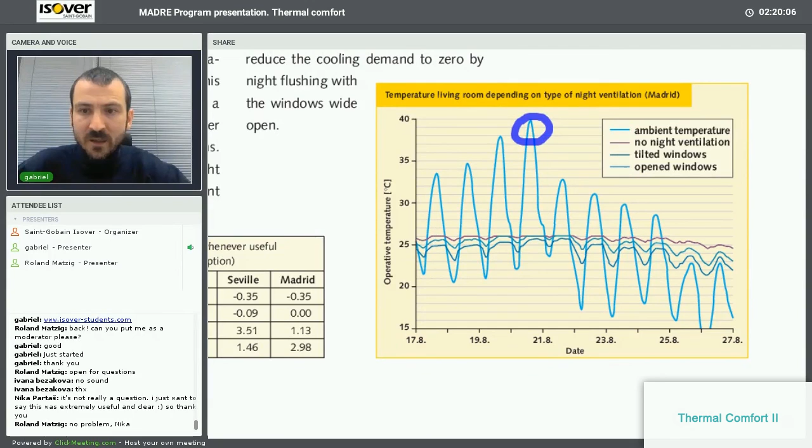Furthermore, this is thermal mass. Then you have some examples about coupling to the ground, about the movable shadings. Then you can see, for example, the analysis of night ventilation, and I'm just going to make it slightly bigger. So here you can see how the temperature is over the night in Madrid. The best example is exactly Madrid. This is the ambient temperature. It can go, around 21st of August, around 40 degrees, and then it shifts down by 10 or maybe 15 degrees in the night. And here you can see what happens if there is no night ventilation, if you have tilted windows or if you have open windows, and you can draw the conclusion yourself when looking at these figures.

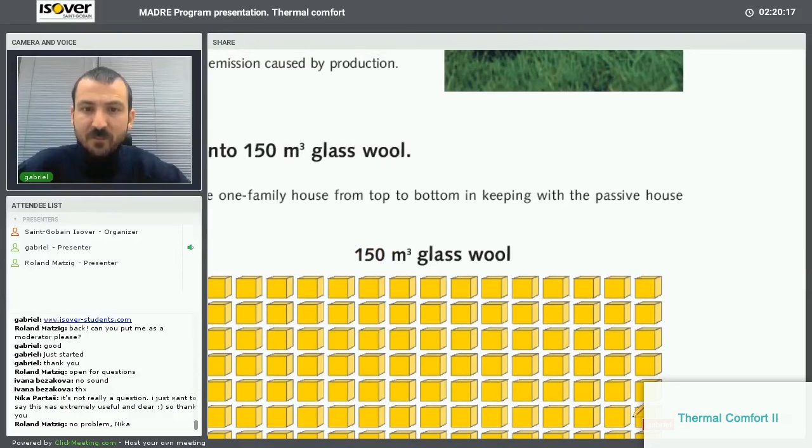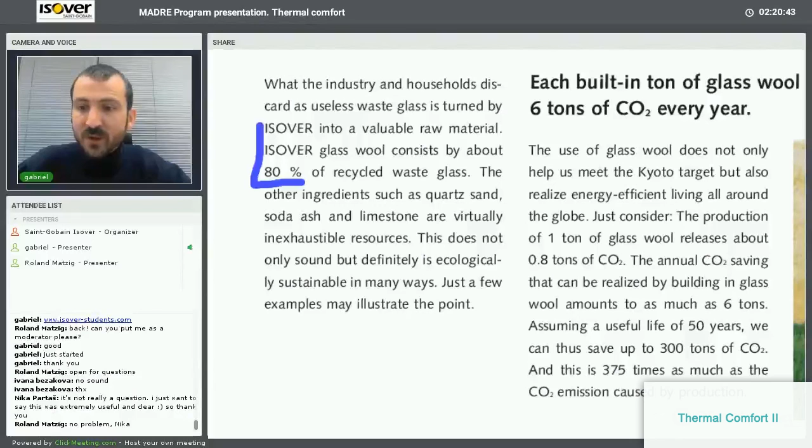And last but not least, you also have some characteristics about the behavior of the material when speaking about the environmental effect and the sustainability effect. For example, in the case of mineral wool, up to 80% can be recycled content. It depends from country to country. I'm not going to enter too much into detail, but I strongly recommend giving it a read, because this is basically a design document for a multi-comfort house in hot climate, and luckily within the analyzed climates you also have Madrid. So again, for plenty of the questions, you will find the answers here.